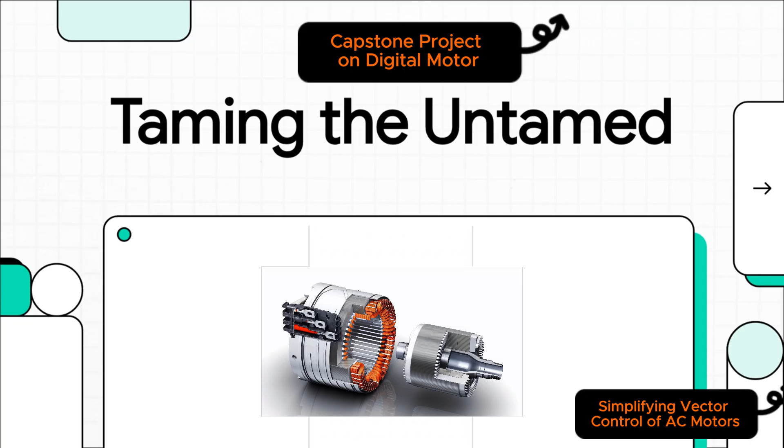It sounds kind of wild, right? But it's totally true. The powerhouse inside so many of the world's most advanced electric cars is a direct descendant of the three-phase AC induction motor, a design that goes all the way back to the one and only Nikola Tesla. It's a piece of history that is literally driving us forward. So getting from a 19th century patent to the sleek EVs we see today, well, that was a heck of a journey. It took over 100 years and a few key breakthroughs to make it happen.

For decades after it was invented, this amazing motor was basically chained to a wall socket. It was an industrial workhorse, but it couldn't really go anywhere. Then, in the 1960s, digital electronics started to change the game. But the real game changer came in the 90s with the portable inverter. That's the device that could finally take DC power from a battery and turn it into the AC power the motor needed to run. That's what made the first modern EVs possible. And fun fact, that tech was eventually licensed by the founders of Tesla Motors. All the dots just connect.

But here's the thing. Making the motor portable, that was only half the battle. Its raw power was never in doubt, but actually controlling that power with any kind of precision, oh, that was a whole other massive challenge. And you can see why engineers were so obsessed with cracking this puzzle. I mean, this motor is a beast. It's incredibly powerful, it's super reliable, and it's everywhere. The problem wasn't its strength, it was its stubbornness. It was like having a champion racehorse that you just couldn't steer.

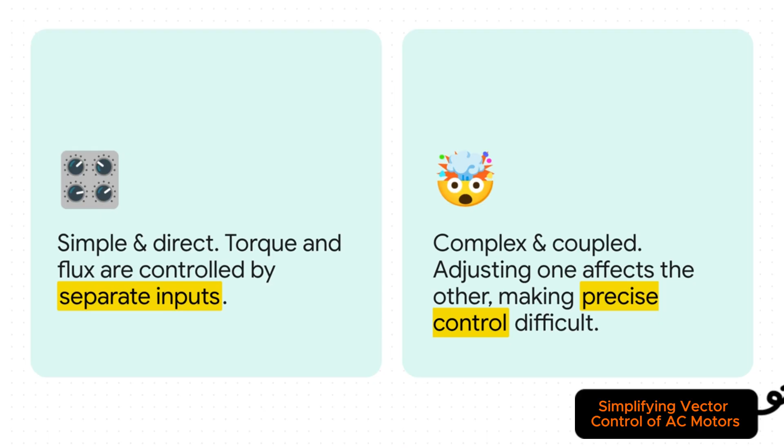Okay? So here's the root of the problem. Controlling a simple DC motor, it's a piece of cake. Imagine you have two separate knobs on the control panel. One controls the power or torque, the other controls the magnetic field or flux. Simple, you can tweak one without messing up the other. But with an AC induction motor, it's like those two knobs are welded together. You try to turn up the torque and you accidentally mess with the flux. This coupling, as they call it, makes precise, responsive control a total nightmare.

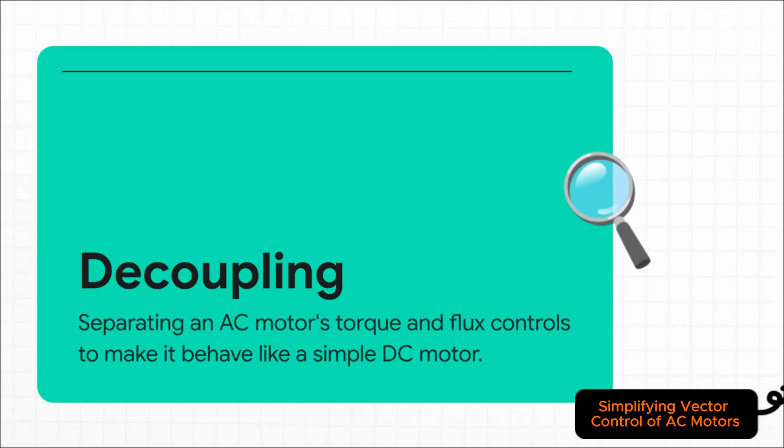So that became the mission, right? The holy grail for engineers was achieving what they called decoupling. They needed to find a way to mathematically pry those two knobs apart, to untangle those controls, and give this powerful AC motor the same simple precision as a DC motor. But how on earth could they do that? Well, the answer wasn't found in new gear or a new piece of hardware. Nope, this solution was pure software. An incredibly elegant, mind-bending mathematical trick that completely changed the game.

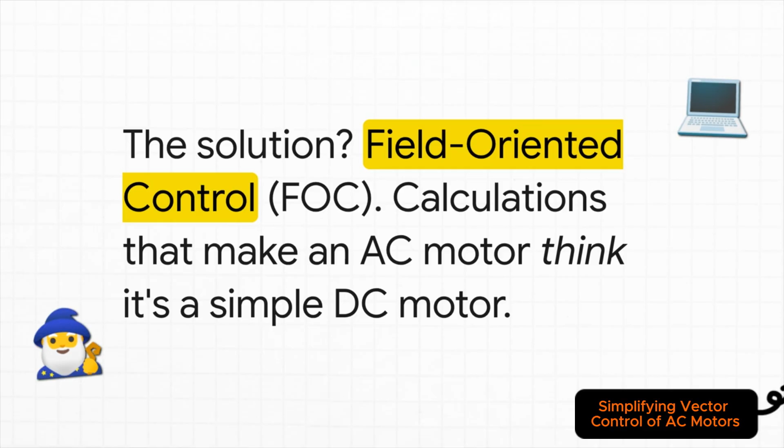It's called Field-Oriented Control, or FOC for short, and you can think of it like a universal translator running on a tiny computer chip. It's the set of really complex calculations that creates a kind of digital illusion. It basically tricks the complex AC motor into behaving like a simple, predictable DC motor. It's genius. So, how does this magic trick actually work?

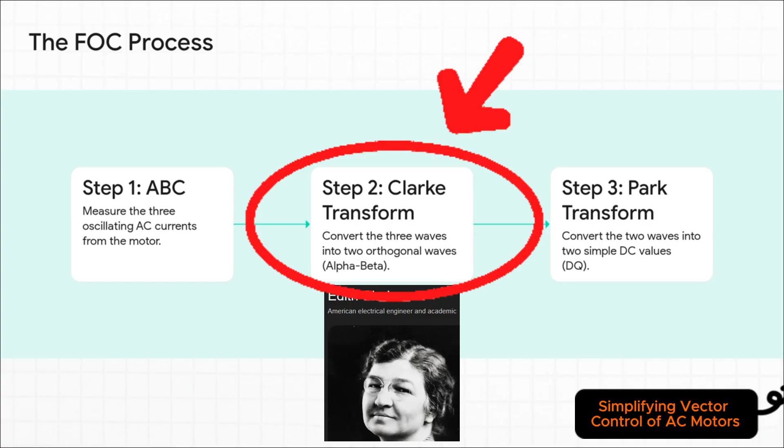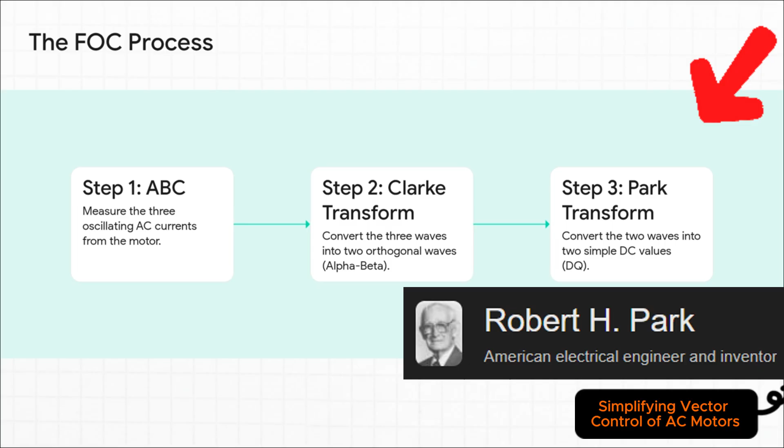Okay, first, the controller measures the three messy wavy AC currents coming from the motor. Then something called the Clarke transform steps in to simplify those three waves into just two. But here's the brilliant part, the Park transform. It mathematically rotates the point of view to perfectly match the motor's rotation, and by doing that, it transforms those two messy waves into two beautiful, simple, stable DC values. And boom, just like that, the problem is solved. In this new mathematical world, one of those DC values gives you direct control over torque, and the other gives you direct control over flux. We finally have our two independent knobs, decoupling achieved.

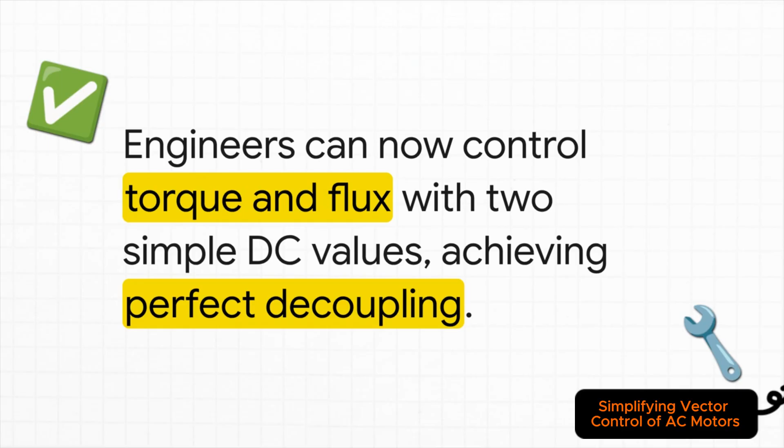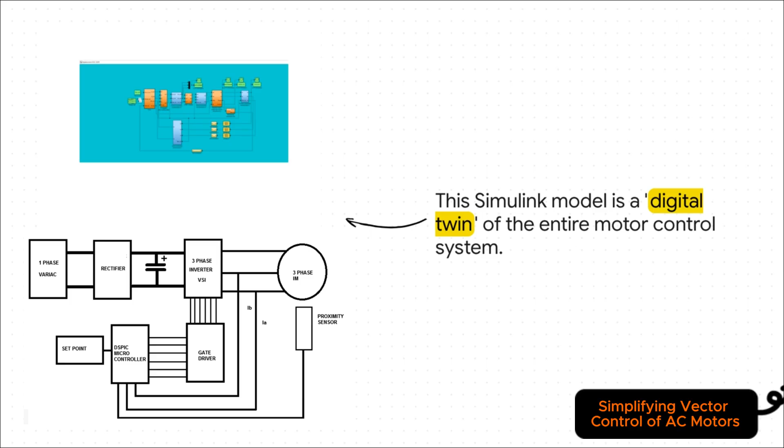Now, you have this brilliant mathematical idea, but you don't just go out and build a multi-million-dollar system and hope for the best, right? Not these days. Modern engineering happens in the virtual world first. So what you're looking at here, this isn't just a diagram. It's what we call a digital twin. It's a complete, working, living, breathing simulation of the motor, the power electronics, the whole shebang. This is the virtual sandbox where engineers get to play and perfect the system before a single screw gets turned in the real world.

And inside this digital twin, every single piece has a job to do. You've got the virtual motor itself, of course. Then you've got the IFOC block. That's the brain, the part doing all that crazy math we talked about. The PI regulator acts like a supervisor, constantly checking for errors and making tiny corrections. The PWM and inverter blocks are the muscle, turning the brain's commands into high power voltage. And the AD blocks, those are the system's senses, feeding real-time info back to the brain.

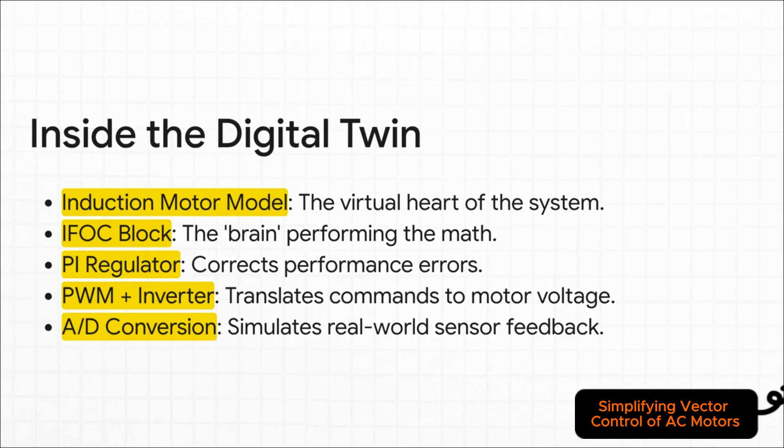Okay, so we've got the problem, we've got the clever math to solve it, and we've built a perfect digital copy to test it on. The only thing left to do now is press run. And this right here, this is the moment of truth for any big engineering project. Does the theory actually work in practice, even if it's a virtual practice? Can our algorithm really tame this wild beast of a motor?

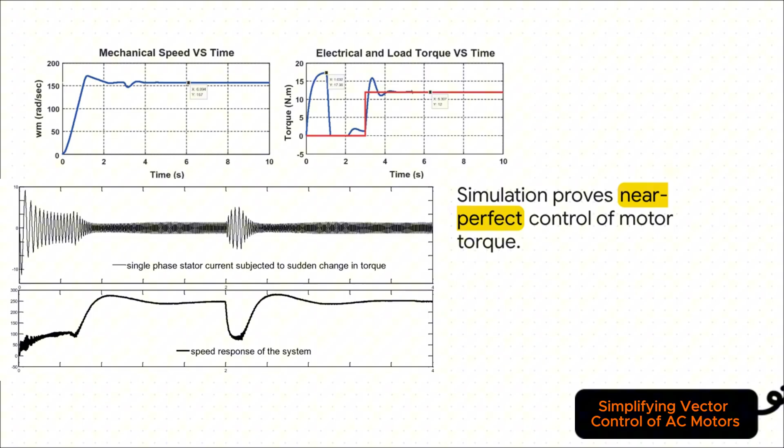The results are in, and they are absolutely stunning. The actual torque the virtual motor produces tracks the target command almost perfectly. I mean, look at that. And even when the simulation throws a wrench in the works, like a sudden heavy load that's like an EV hitting a super steep hill, the controller responds instantly. It maintains perfect control without even breaking a sweat. So the conclusion is crystal clear. In the digital world, at least, the challenge has been completely solved. The control algorithm is precise enough for incredible performance, stable enough for safety, and tough enough to handle anything the real world can throw at it.

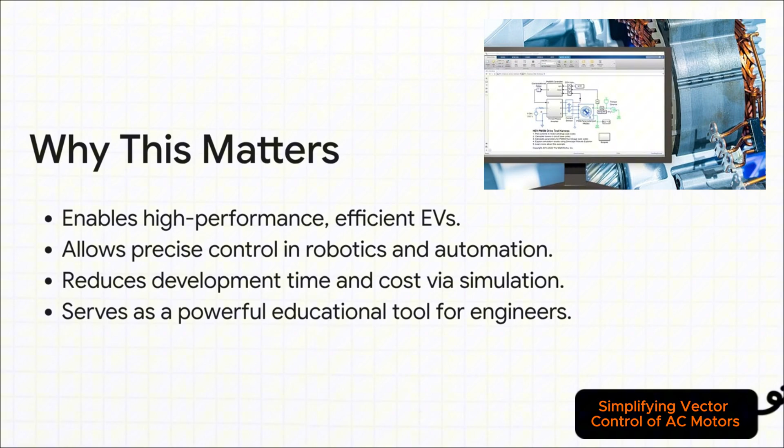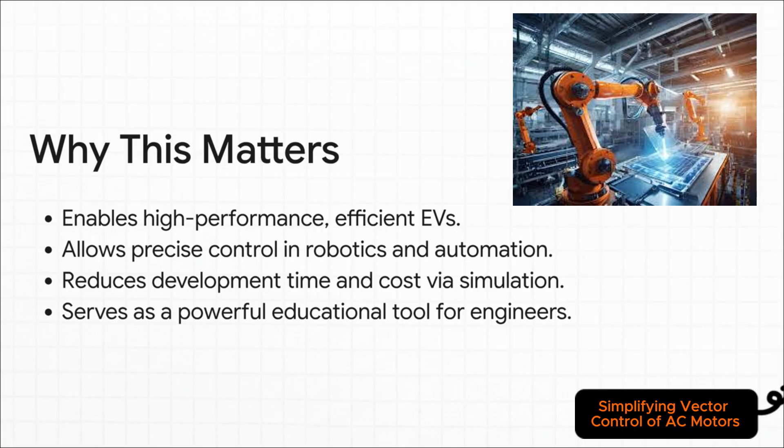And look, this isn't just some cool academic exercise. This is the technology that makes modern electric cars feel so responsive and so efficient. It's the brain inside high-precision robots and automated factories. And by figuring all this out in a simulation first, companies save millions of dollars and tons of time getting better products out into the world faster.

When you step back and look at it, this is just an amazing story about the power of software to completely redefine what hardware can do. It proves that even a 140-year-old invention isn't done learning. With the right code, you can teach it brilliant new tricks. And that just leaves you with one final thought, doesn't it? What are we going to teach the machines of tomorrow?